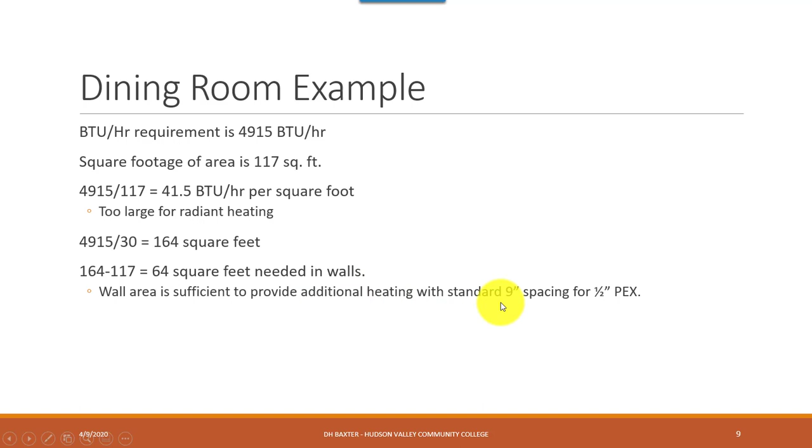And that's the only room that requires it. All the rest I can get away with just in the floor. This is a house in Watertown, New York, and that one room really does need a little bit more because that dining room is just exposed to nature and the elements in the wintertime. So we can keep our 9-inch spacing and get away with it. I just wanted to show you that because that's the only room that's really tricky on this project. All the rest of them, you're going to find that the 9-inch spacing works fine.

You're going to have no trouble getting the rooms taken care of. The bathrooms you can drop down to 6 inches. That is standard procedure, do so. But for the rest of the house, you can keep it at 9-inch, and it's just that you're going to have to run it through the walls in the dining room as well.

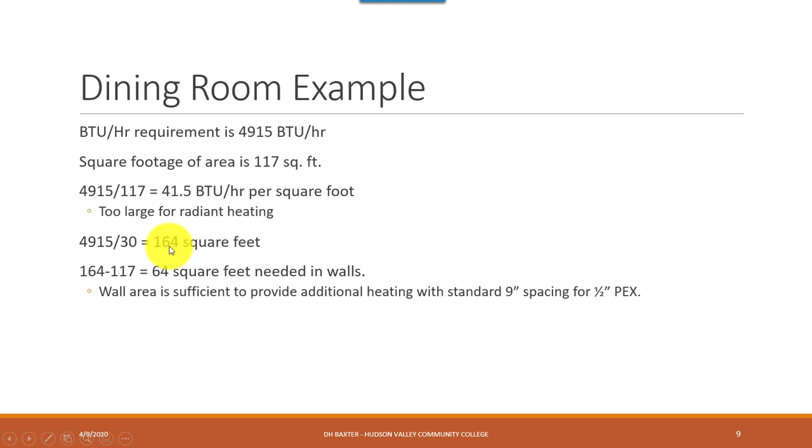So when I ask you how many feet of pipe you need for the dining room, it's going to be a bit more than what you would calculate from the 117, right? Because you need 164 square feet of space. And again, I'm assuming 30 BTU per hour per square foot based on these calculations. So I'm at the high end of what's listed, but you can do that today with good insulation underneath the subfloor and with the metal plates and the low temperature drops. It will work, you can get those kind of numbers out of a subfloor system.

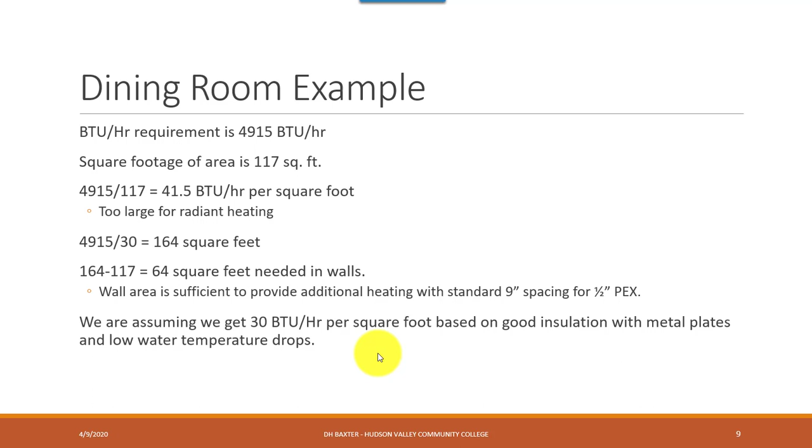I went and I killed my calculator. That was a very silly thing of me to do. Oh well. Sorry about that, I didn't mean to kill the calculator right away. Accidentally hit the X button on it, but that's all right. I got the one here on my phone.

You'll just have to trust that 164 times 1.34 for that dining room works out to be 220 feet. And I can have a 300-foot loop, so 220 feet fits. And that would be the answer that goes into the box, 220, in the handout for the hydronic heating.

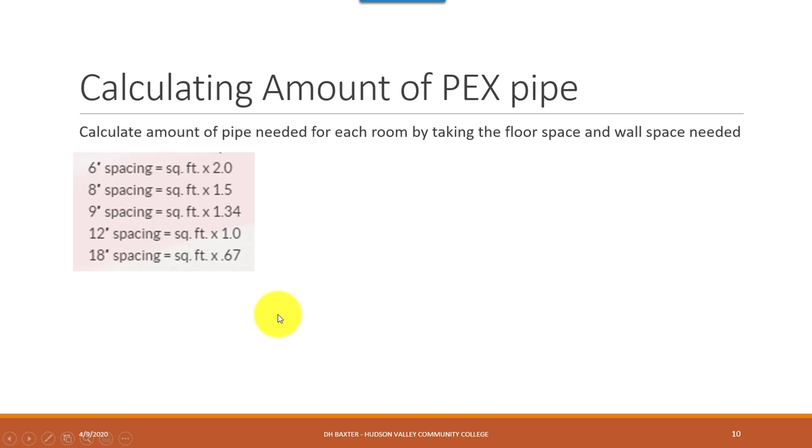And I ask how many feet of pipe do you need, and the answer for this room would be about 220 feet. So with that, you now have the ability to calculate the square footage throughout the entire space. And of course, if you divide the amount of the floor by the maximum loop length, determine number of loops, and the manifold ports for the floor. Now, I'm not asking for that information, but that's how you would get that information if you needed it.

Now, this begs a question: what do we do if, like in this case, we calculated 220 feet of pipe, and we can have up to 300? Could I use 80 feet of that to start running into the next room? The answer is yes if they're in the same zone. However, you really don't have 80 feet of extra pipe. Let me show you that.

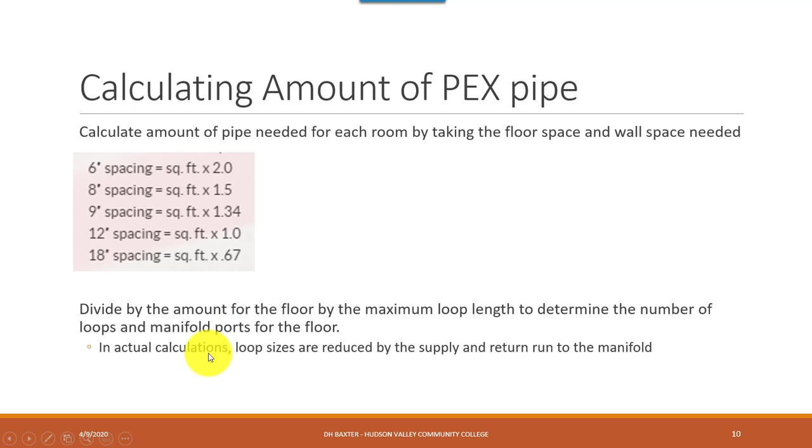It depends where you places your... oh, good heavens, I shouldn't have done that. It went backwards. Sorry about that.

So next thing you know, you're close to the 300-foot loop. I just want to make you aware that in real life, that's what's going to happen. But again, we don't have the software that does all that for you, and I'm not going to ask you to do it by hand because nobody in their right mind would do that by hand anymore out in the field. So I'm not going to ask you to do something you wouldn't be doing out there working. But be aware that when I ask you for the footage per room, I'm not accounting for these line length runs, so the numbers you come up with on this project are probably going to be a little short of what they need to be in reality.

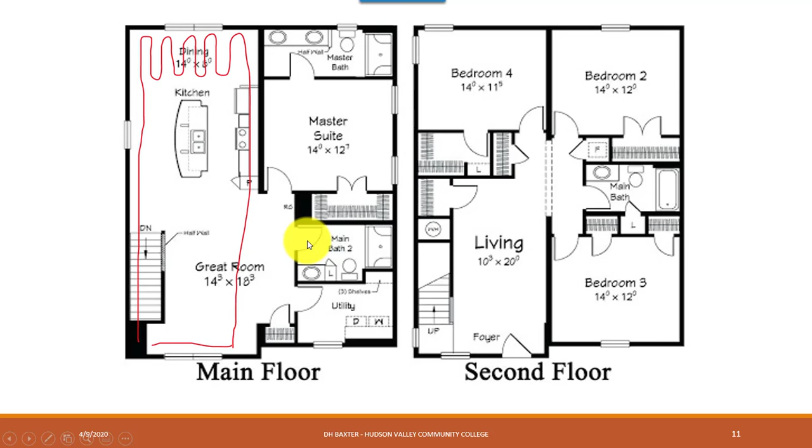So don't think that when you go out there and start doing these calculations for real using the software, you're going to get numbers like this. You're going to get numbers a lot longer than what you get for this project, because I'm not asking you to deal with this nonsense. Right now the only way you can do it by hand means you've got to figure out in advance where to put all these manifolds and then calculate that extra bit of line length. But I won't ask you to do that.

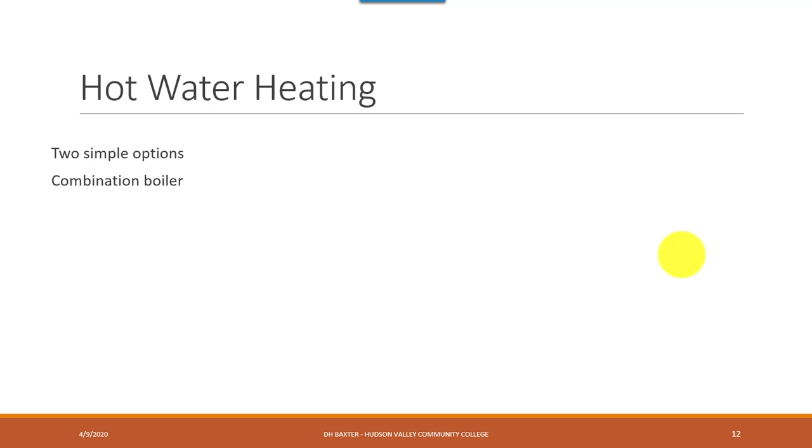The hot water heating turns out to be fairly straightforward. There are two very simple options in the system, and I just want to make sure you're aware of those because you're always going to get asked. The combination boiler is the simplest, where you have a boiler within the boiler. So you've got the heating element, and it just heats an internal tank that's also used for your hot water system for sinks and baths. It's a tank just within the boiler that contains the hot water, with a nearly instantaneous recovery time. That's the beauty of that system—it's very hard to run it cold.

The other option is an indirect boiler with a separate side tank. So what you're doing is boiling the water in one tank, then transferring it over to the secondary tank, which is a little more like a hot water heater system in a house that's air cooled or heated. For example, I've got a hot air furnace, and my hot water heater is a gas-fired unit totally separate from my HVAC—it has nothing to do with it.

But with these boiler systems, if you're doing hydronics, it's kind of crazy not to have your hot water included, so these two systems handle that well. The indirect boiler is not quite as fast a recovery as the combination boiler, but it's still a matter of minutes—not too bad. Whereas my gas-fired unit, if I pump it dry and there's nothing but cold water in the tank, it takes a good 20-25 minutes to get the heat back up if somebody takes an incredibly long shower.

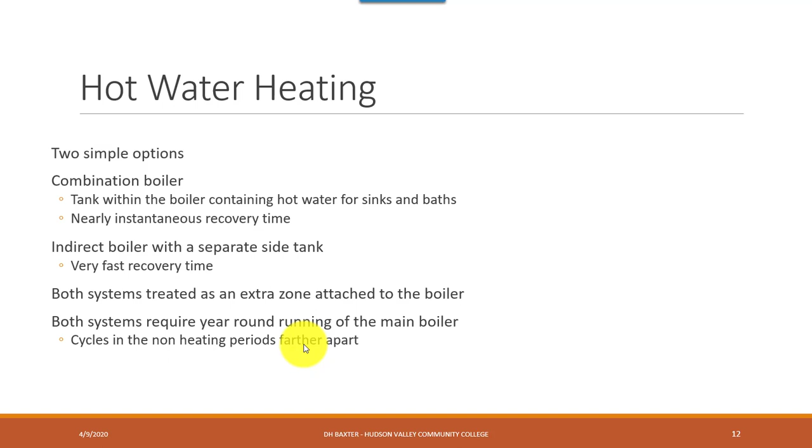Both of these systems mean that when you let your boiler heat your hot water, you're running your boiler all year. So even in the summer, you're doing some minimal cycle running to make sure the hot water is there—obviously a lot less running than in winter, so the cycles are much farther apart. It may only need to run a couple or three times a day, depending on how much water you use, how long people take showers, and whether they all shower at once or spread it out through the day.

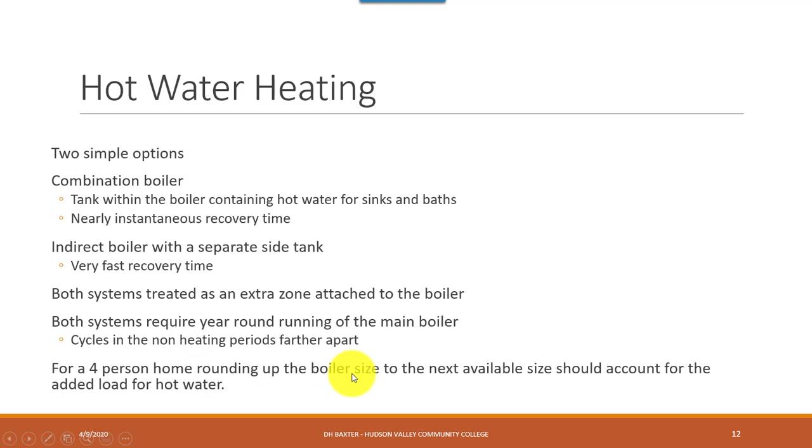That went a little faster than I anticipated. So, for a 4-person home, usually if you round the boiler size up to the next available size when sizing the boiler, that roundup will take care of the hot water as well. You don't really need to do much math other than just make sure that it's there.

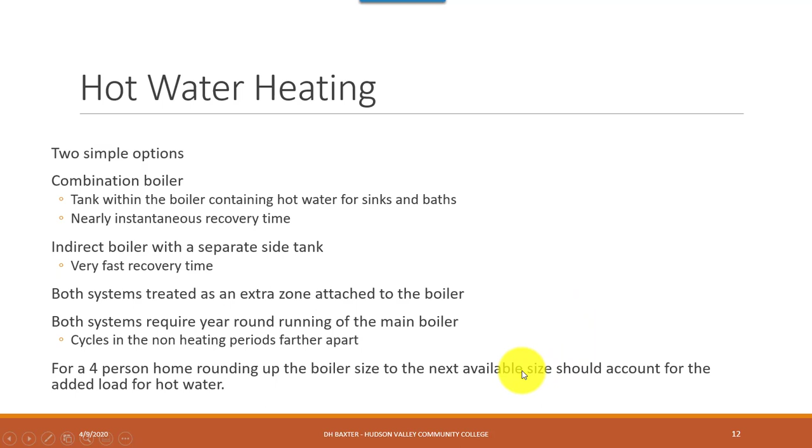Normally, a 40 to 50 gallon tank is all you need for 4 people. Some people like to go with 60 gallons because they want the capacity if they really want to soak themselves in the tub for a long time.